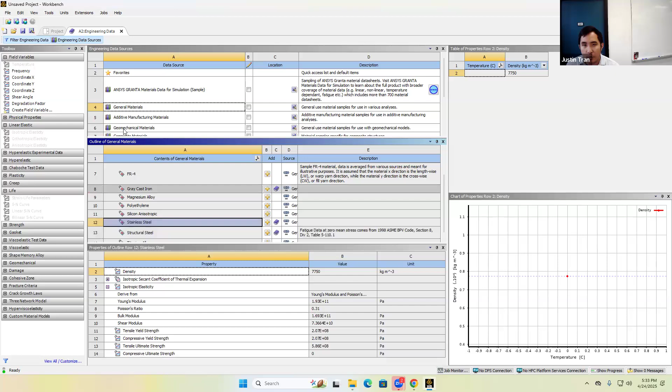I think stainless steel is actually quite similar to structural steel, but we'll go ahead and add that, looking at the stats here, very similar, but we'll add stainless steel here. So you should have three materials in your project: stainless steel, gray cast iron, and the default structural steel.

Okay, all right. So once you are done adding material properties, let's go ahead and close out of this. Double click on model, so let's go ahead and open up our ANSYS Mechanical here. And we'll be adding our mesh and boundary conditions, just like we've always done.

Now the reason we're starting with static structural is a couple of reasons. One being that, like we mentioned on Tuesday, when you're running a modal analysis and solving for the resonant frequencies, the state of stress within the material does affect the resonant frequencies. So we're starting with static structural so we can create a situation with some static stresses, and we'll see how that affects our results for the resonant frequencies.

But also later on, when we do frequency response, you'll be able to see kind of the result of resonance as well. So you'll be able to compare the deformation that you get from a static simulation versus when resonance is occurring. You'll see that resonance is going to act to amplify our static deformations.

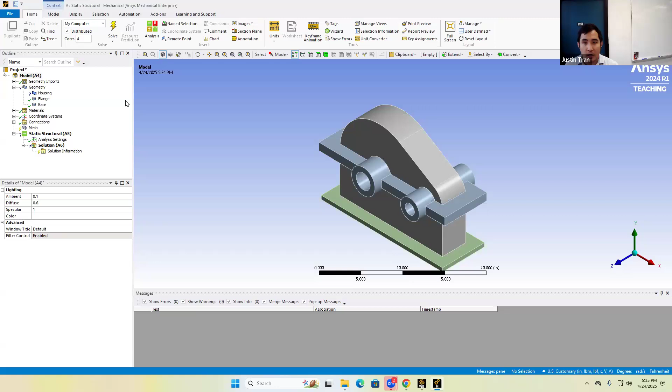Okay, so after you've loaded in your geometry, you should see the part right here. Our geometry today consists of three separate parts: we have the base plate, and that's where we're going to fix it. We have the flange, which is where shafts and rods are going to attach to, so this is where we're going to apply our forces. And then we have the main structural housing here.

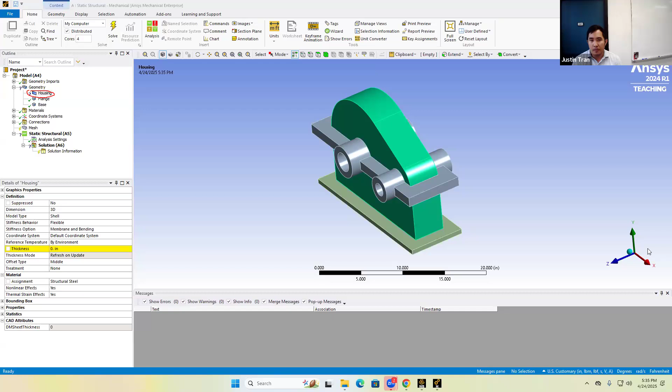Now, if you notice, the housing part here has a question mark next to it. That's because this housing component is actually defined as a shell. It's a little bit hard to see because the bottom of the part here is covered by the base, but this housing part actually is a shell element, so we actually do need to specify a thickness here.

So for the thickness for this part, we're going to specify a thickness of 3 millimeters. If your unit system is not in millimeters, go ahead and change that up here. So go ahead and specify a thickness of 3, and that's going to change the indicator next to housing to a green check.

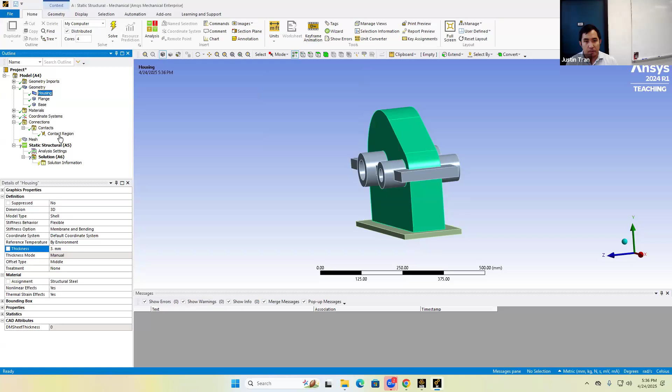All right, so another thing that we're gonna need to add before we start to mesh is we need to add our contact regions here. Right now there's only one contact region, and that's in between the housing and the flanges. But since our housing here is a shell, it's actually not properly attached to the base just yet.

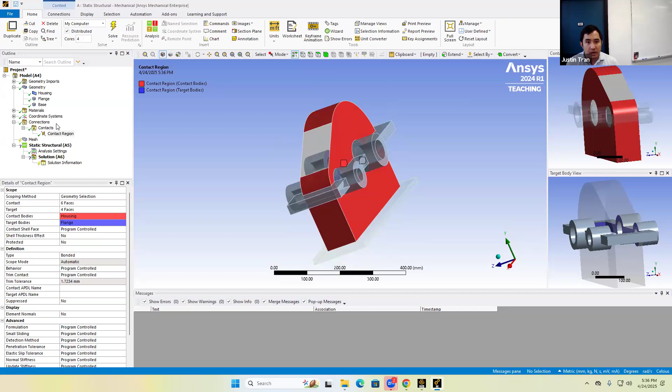Okay, so let's go ahead and do that. Let's go ahead and add a contact region. Just like we did in activity 4, right click under contacts here and insert a manual contact region. We're going to use this to connect the housing, or the gearbox, to our base.

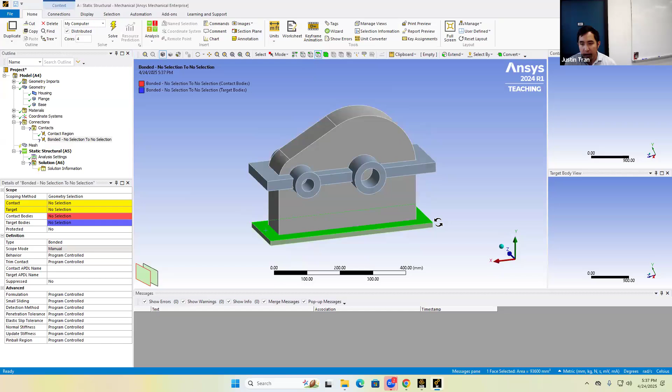Just like we did in ANSYS activity 4, we need to specify our two parts of the geometry here: our target and our contact. Remember, the difference between these is that the target has to be the bigger of the two surfaces. Since we're connecting the housing to the top of the base, given by this plane right here, this surface, we're going to specify that as our target. Then for the contact, we're going to specify the bottom edge of the housing here.

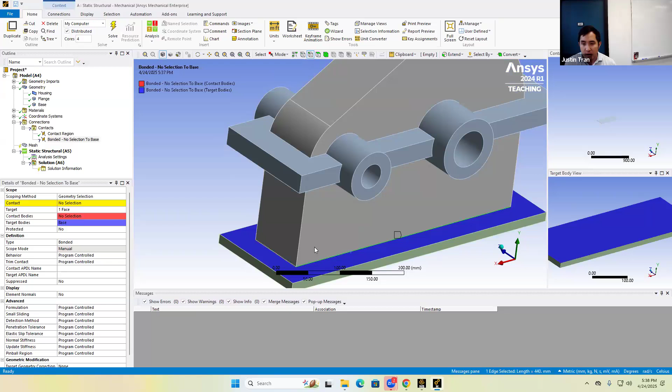Now, you have to be a little bit careful here, so make sure that, if you want to be absolutely sure, you can change the selector mode to edge mode up here. Then hold Control on your keyboard and click all 4 edges around the bottom side of the housing.

Okay, so once you have those 4 selected, go ahead and click apply here. So that way we've connected the bottom of the housing to the top of the base.

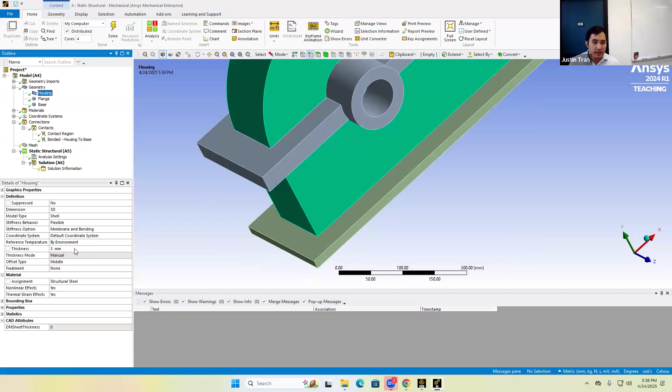Okay, and so that's all the adjustments that you should have to do. So just to summarize, make sure you specify a thickness of 3 millimeters for the housing, and then for the contacts, make sure that you specify a bonded support between the bottom of the housing and the top of the base.

Any questions on this so far? Okay, good. All right, so next thing we're going to do is we're going to specify a mesh.

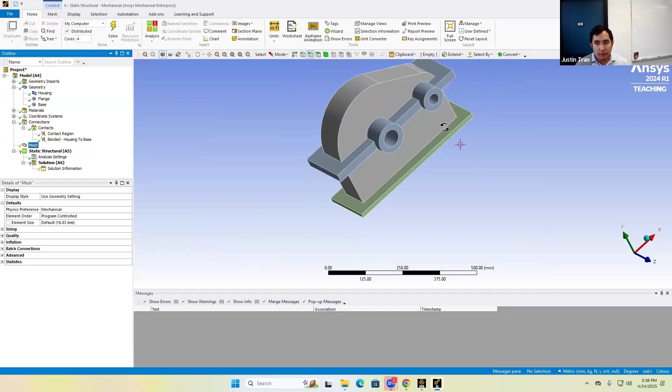Now for this activity, we're not going to be too picky on the mesh, just because modal analysis is a pretty cheap, relatively cheap analysis. So what you're going to see is that the resonant frequencies you get should converge pretty quickly. I'm just going to specify a size, not bothering to change the method. So let's specify a mesh size of, let's say, 8 millimeters. But you could probably even use the default mesh size and it should be fine as well.

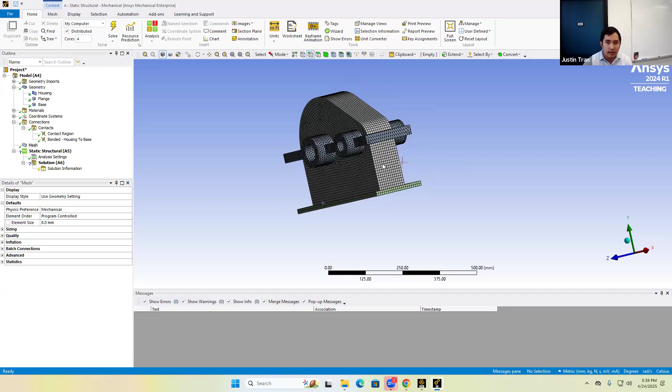So let's see what this looks like with 8 millimeters. Okay, so this is what my mesh looks like with 8 millimeters. You can see we have hexahedrons at the base, quadrilateral elements for the housing shell, and since the flange is a rounded geometry, ANSYS has chosen tetrahedral elements for that.

But again, don't fuss over the mesh too much in this activity. You're going to get pretty consistent results even with a fairly coarse mesh.

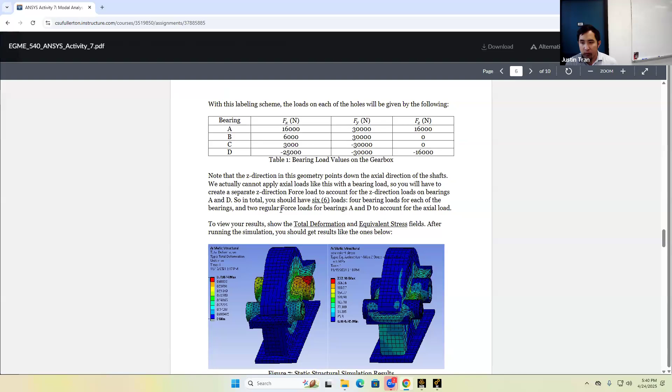Okay, so let's talk about the boundary conditions next. If we go to the activity here, if you scroll down enough, you'll see the loading conditions that we have. So we're going to be applying force loads on all 4 of these flange holes here. You can see from the top view, I've labeled them A, B, C, and D. And the forces are given by the following here.

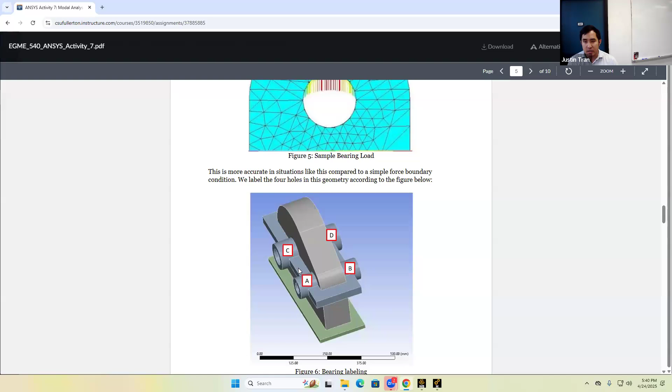So you can see we have forces in all 3 components in some cases, so X, Y, and Z. Okay, so you can go ahead and apply forces on these holes here. But we're going to apply forces in a little bit of a different way.

And the main reason I'm introducing this now is that some of you may be interested in doing this for your final projects. So we're going to be using a different type of load here known as a bearing.

Okay, so if you right click on static structural A5, you go to insert. You'll see that there is an option for loading here called bearing load. And if you read the description for bearing load, you can see that it says it inserts a bearing load boundary condition that simulates the radial forces applied on the interior of a cylinder.

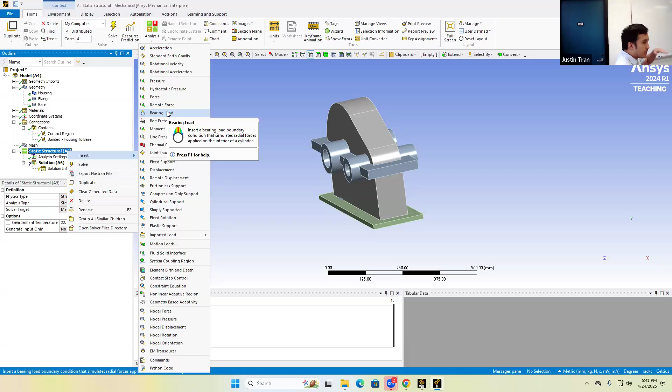So this is a special type of load that you can apply on circular type geometries to simulate the fact that you may have a rod that's inserted into the hole and kind of pushing up on one side of the hole.

Now why would you want to do this, right? So normally the way that we would do this is that we would just select a simple force load, and then apply it to, let's say, the interior surface of this hole. And then you apply your force in components. Right, and then you specify X, Y, and Z. So that's how we've always done it, right?

Now, I think I may have mentioned this before, but when you specify a force that's going to be distributed over a surface like this, what ANSYS actually does is that it evenly distributes that force across the entire surface.

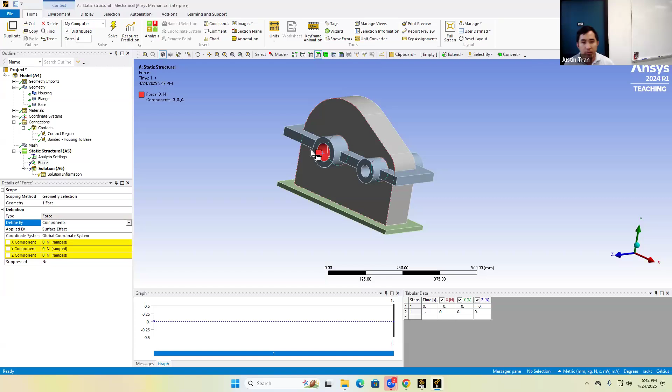So let's say that we apply a force in the X direction, a force of, I don't know, 5,000 newtons. So we have a force of 5,000 newtons being applied in the X direction. What ANSYS is actually doing is taking that 5,000 newtons and distributing it as if every single part of that surface is experiencing an equal amount of force.

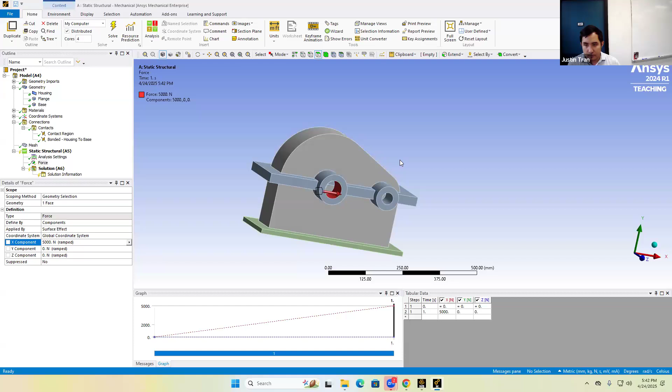So that means this part of the surface is experiencing the same force as this part over here. It's evenly distributing it across that surface. Now, for a lot of cases, this is what we want. We do want our force to be evenly distributed across our surface.

But for a cylindrical kind of hole like this, it's actually a case where we don't want that to occur. Imagine a rod that's being inserted into this hole, and there's a force being applied on this rod. Overall, there's going to be a net force applied on this hole, but it's not going to be evenly distributed because the force is due to the contact of that rod with the surface here.

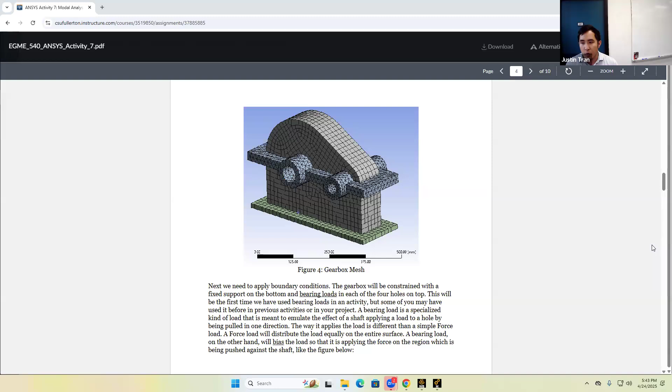If you think about it, if you put a rod in and you pull it one way, most of the force is going to occur on the portions where the rod contacts the inside surface of that hole. So what you have here is kind of an uneven distribution of the load, that actually looks something like this.

This has a similar situation where you have a hole here in a rod that's being inserted, and we have an overall net force being applied upwards. Now, because that force is being applied by a rod, most of that force is going to be concentrated on the upper half of that hole, because it's due to that rod contacting with that inner surface.

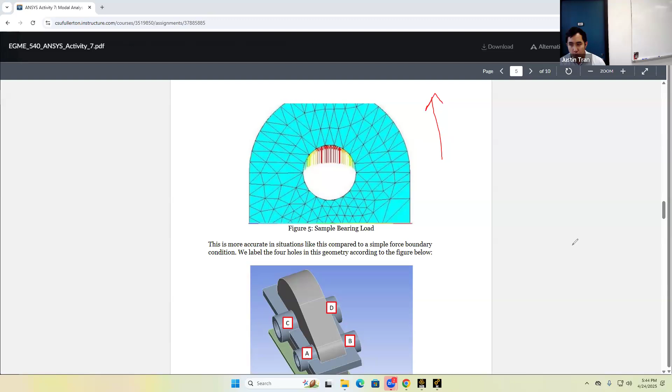And so we want to simulate that. We want to make our loading conditions a little bit more realistic. And the way that we can do that is not by applying a force load, but by applying a bearing load instead.

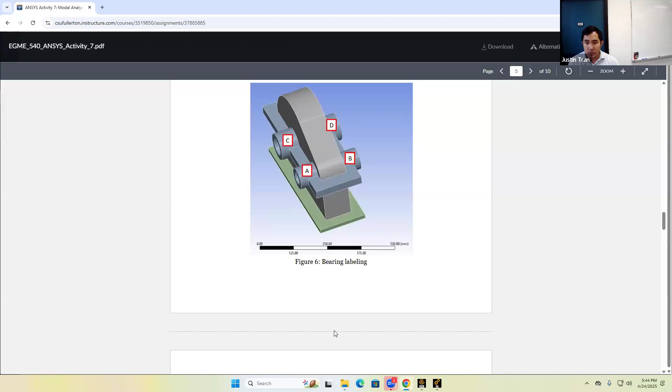So if we apply a bearing load on this surface, we can once again define it by its components. Now you can insert a bearing load, so let's see, that's hole C. Hole C has a force of 3,000 newtons in the X direction and minus 30,000 newtons in the Y direction. Let's go ahead and put that in: 3,000 for X, minus 30,000 for Y.

So you can see that puts a force mostly in the Y direction, but a little bit in X as well. But now how that force is distributed is a little bit more realistic to how that force would be applied in practice.

Go ahead and do that. I'll give you guys a few minutes to work on that. We have 4 different holes here and 4 different loads, so go ahead and apply those loads and make sure to use the bearing loads on those holes. Now you may run into an issue with holes A and D, but we'll talk about that in a second. So go ahead and apply your 4 bearing loads. I'm going to go ahead and apply it on my end too. If you have questions on this part, just go ahead and raise your hand. I'll make note.

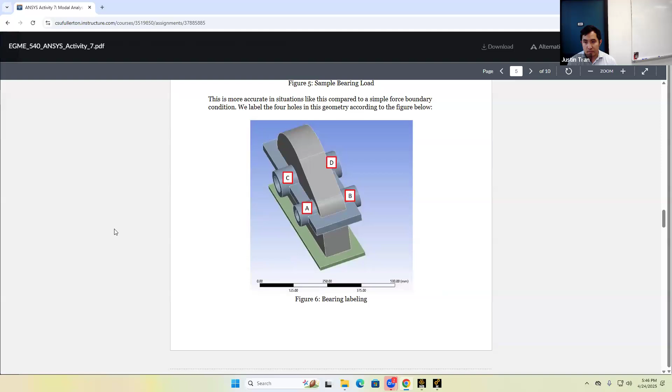Don't forget that you can relabel your loads, so you can rename them. In this case, it's probably useful just because there's so many loads to apply here.

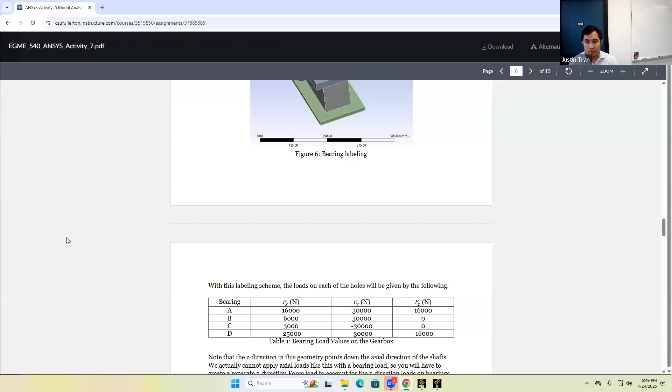How's everyone doing applying these loads? Anyone run into any issues yet?

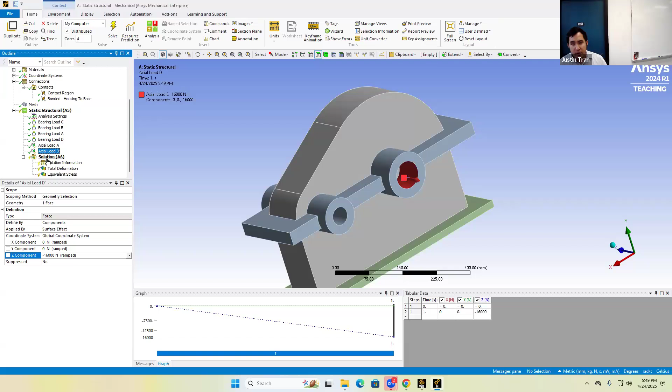If you try to apply all of the loads in the bearing loads, you might have run into an issue with load A and D. Holes A and D here are unique in the sense that they actually have a load in the Z direction. Now, if you look at the Z direction, it actually goes right down the barrel, or right down kind of the axial direction of the holes themselves. So a limitation of the bearing load is that you can only apply loads in directions that are perpendicular to the cylinder wall. In this case, because the cylinder walls are in the XY plane, you can only apply loads in the XY direction.

So if you want to apply a load that actually goes down the length of the hole, you need to apply that as a separate load. So for hole A and hole D, when you apply those Z direction loads, you need to apply them as a separate force condition. You can't actually apply them as a bearing load, so just be careful of that. Bearing loads are really nice, they're a nice feature within ANSYS, especially if your geometry has a lot of holes and you're applying loads inside those holes. But be aware of the limitations as well, and you can't apply any axial forces or axial loads on those parts of the geometry.

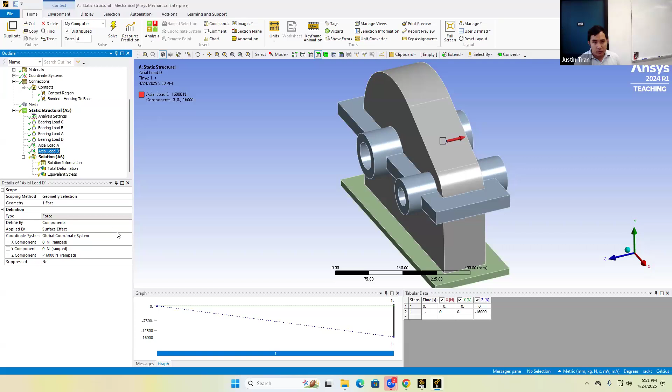Any questions on that? All right, so if you're done applying your loads, go ahead and add in the total deformation and the equivalent stress. Let's go ahead and hit solve.

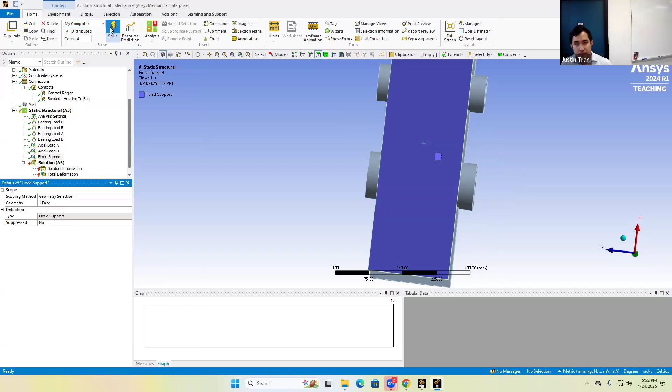Oops, I forgot. Don't forget your fixed constraint, you need that as well. Rookie mistake. All right, so add your fixed support. Our fixed support is going to be on the bottom of the gearbox. There we go. All right, so now we're ready, so now we are running our simulation.

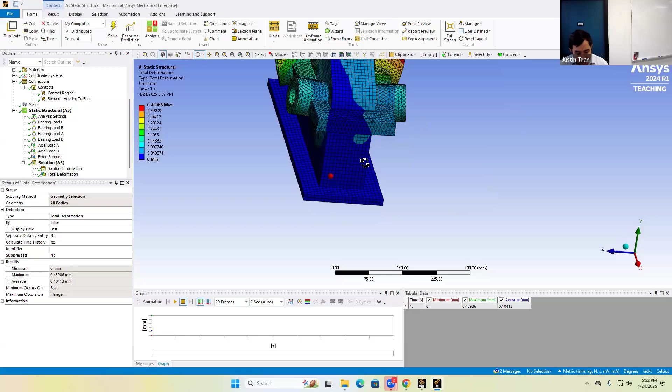Okay, so you should get a total deformation that looks something like this, and then your equivalent stress is probably going to look something like this.

The axial load is normal load on the face, right? Wait a second, the axial load is just a normal load, it's just normal force. On the face, right? Same face. Yeah, same face.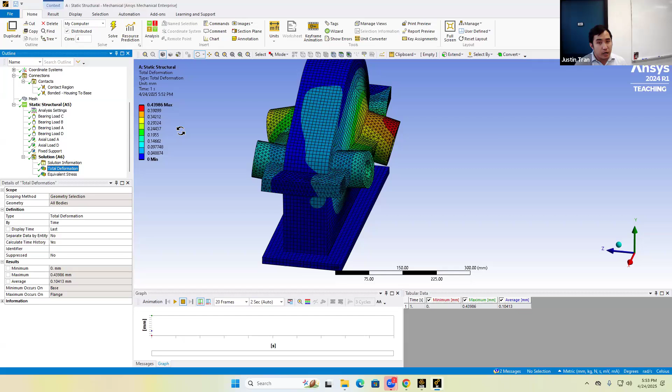All right, so this is what we have here, and I'm looking at the comparison with the activity. I'm using a little bit of a finer mesh here, and that actually makes our deformation computations a little bit more accurate. So don't be alarmed if your deformation is not exactly what it is in the activity, it does depend strongly on your mesh density. Probably what I should have done for this activity is a mesh convergence test, but we'll just roll with what we have.

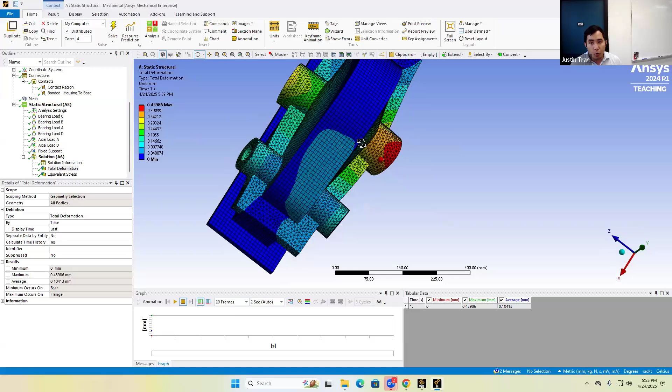But you should get a deformation field that looks something like this. Most of the load is going to be applied on hole D, and so that's why this is kind of pushing down. And a lot of your stress is going to be occurring right at that intersection in between. So that's just kind of a very basic static structural analysis for this part. Any questions on this so far?

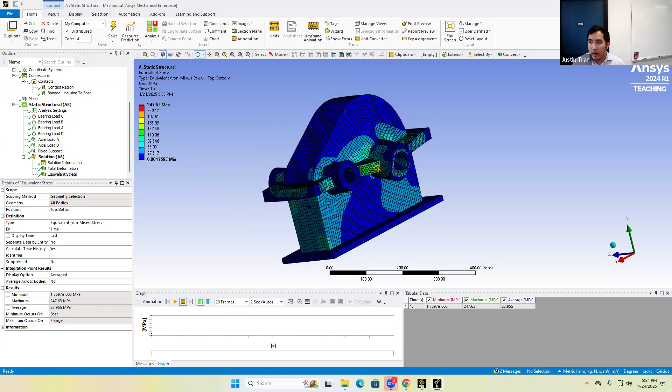Okay, all right, so that's our setup here, let's go ahead and move on to the new stuff. Let's go ahead and close out of ANSYS mechanical so that we can start to do our modal analysis. Let's go back to ANSYS workbench. And what we're going to add here is a modal analysis. So go ahead and click and drag modal, and you're going to drop modal on top of model in workbench right here, just like this. And what this is going to do is link together your static analysis, so it's going to inherit the mesh and the boundary conditions from your static analysis and use that as the basis for your modal analysis.

So I'm going to go ahead and click and drag that, and what I'm going to click from here is setup. So after you've connected your modal analysis to your static structural, go ahead and double click on setup to reopen ANSYS mechanical, except now it's going to have the modal analysis attached to it. All right, so was everyone able to get to this point here? Everyone have modal opened up on ANSYS?

Okay, and so from here it's pretty straightforward. Remember, all that we're interested in for the modal analysis is going to be our resonant frequencies. Now there's two ways that you can do this, one way is you can do it without any pre-stress. So if you go under modal B5 here, you'll see that there's a setting for pre-stress. Right now it's set to none, but if you want, you can set the pre-stress environment to static structural, which it seemed to do automatically for me here. So actually let's start with that, let's change our pre-stress settings to static structural, and then let's go ahead and hit solve.

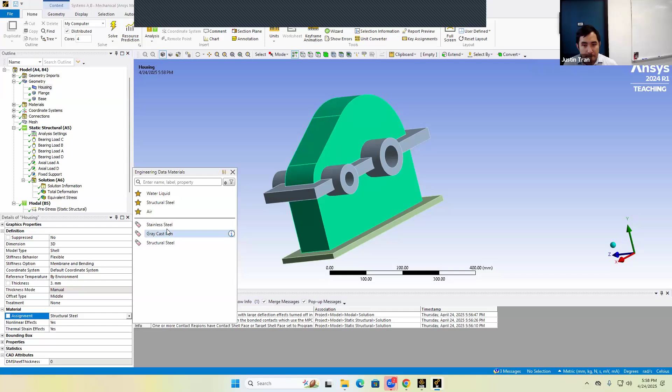Now for your other two parts here, they're going to be made of gray cast iron, so go ahead and choose that. For the flange here, go ahead and choose gray cast iron. And then for the base, go ahead and choose gray cast iron as well.

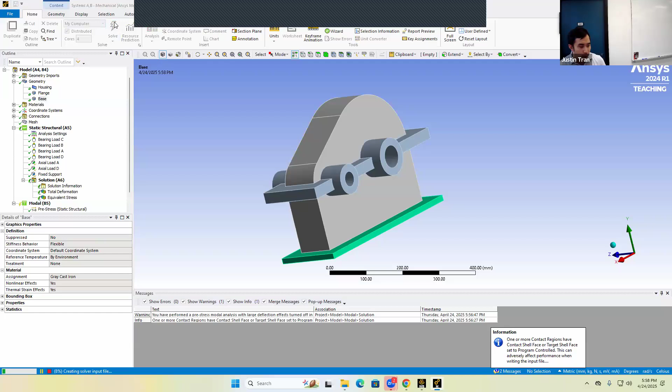Okay, now that we've updated our materials, let's go ahead and hit solve. That's going to resolve everything for us, so it's going to solve for the static structural analysis as well as the modal analysis. It might take a bit of time because it has to solve kind of 2 simulations at once.

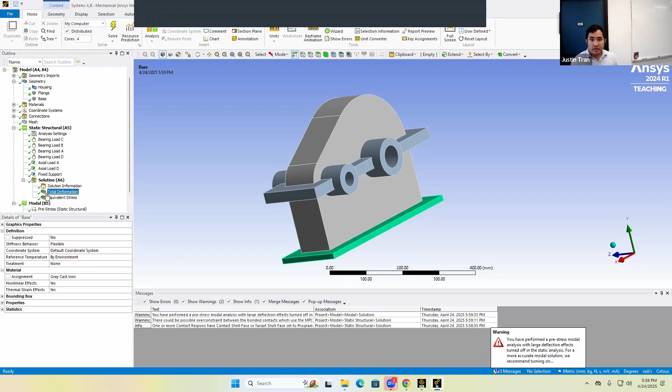Okay, so that's a bit better. That's a bit more consistent with what's in the activity. So in the activity paper, we have a total deformation of about 7.73 millimeters, and our maximum equivalent stress is about 240 megapascal.

Now let's see how that affects our resonant frequencies. You can see our resonant frequencies have changed a bit. Maybe the first resonant frequency didn't change all that much, but all the subsequent frequencies changed. Now our second resonant frequency is 503. Our third resonant frequency is 540. And 579, 661, and 767.

All right, and so that's about it. That's modal analysis for you guys. The main thing that we're looking for are these resonant frequencies. And remember, you're going to be using these resonant frequencies to design your system.

So for instance, this is a gearbox that's meant to go on a car, right? And so you want to make sure that these resonant frequencies don't match the RPM of the engine that's attached to your car, because that engine is going to be constantly applying this oscillatory load. And so you want to make sure that your gearbox's resonant frequency is nowhere near what the RPM of that engine is going to be.

Let me show you one other cool thing you can do here. In addition to the resonant frequencies, you might also be interested in seeing what the mode shapes look like as well. So to view the mode shapes, you're going to go ahead and highlight all 6 of these frequencies here, right click, and then click on the second option here for create mode shape results.

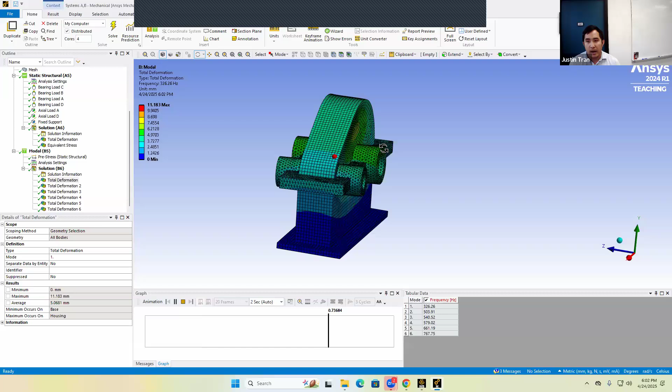So now you can see how the mode shape is going to look if resonance were to occur in this geometry. Most of the resonance is going to occur in this top portion right here. In fact, you can play the animation to see what it would look like. You can see that the entire structure is going to be rotating left and right, and then this top portion here is going to be bulging out. So that's where most of the resonance is going to occur.

Okay, now be careful with this. Remember I mentioned on Tuesday that when you're showing the mode shapes in ANSYS, ANSYS presents it to you in a way that's a little bit misleading. If you look at this mode shape result, you can see that it's listed as total deformation, and it even has units. From this, it says the deformation is going to be 11.1 millimeters.

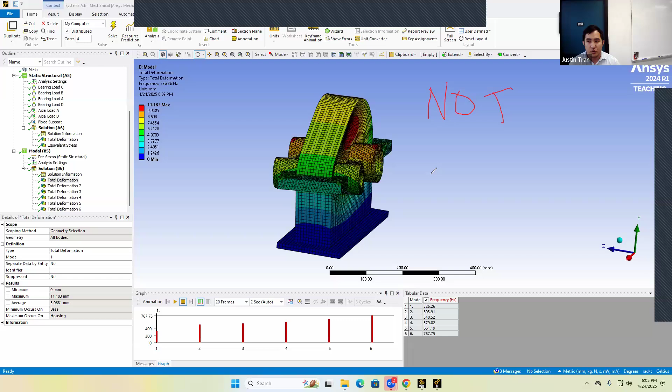Remember that when you're showing the mode shape results, these are not true deformations. This is not the actual deformation in this case. These numbers are only there to show you the relative amount of deformation for that part of the geometry. We haven't actually applied any loads here, even though we did apply the pre-stress. So when you're showing the mode shapes, these are not true deformations. I put it in big writing to emphasize it: not true deformation.

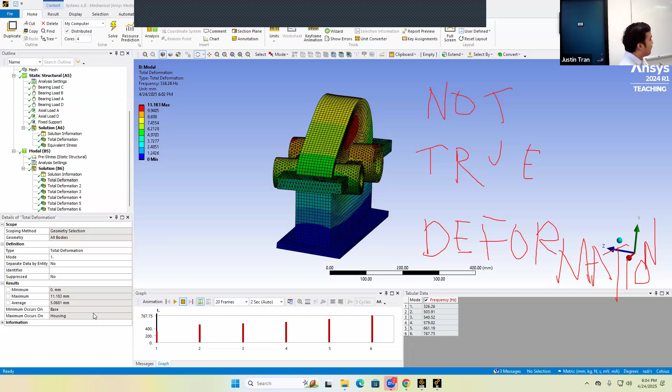So don't show me these mode shape results and say that this is the amount that is going to deform. That's not true. These mode shape deformation plots, quote unquote, are only there to show you the shape of how the resonance will occur.

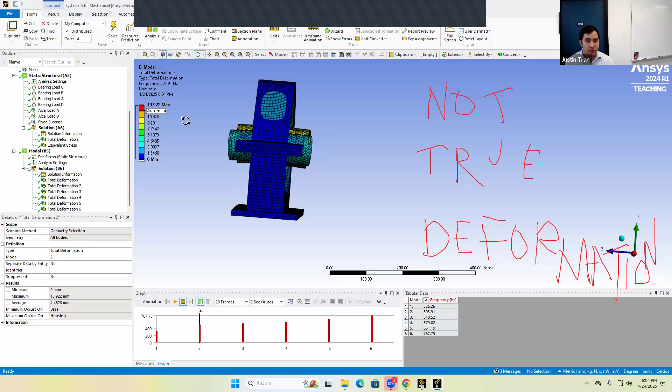Because if you look at the second mode, we can see that the mode is completely different. If we play the animation here, you can see that this resonant mode has to do with expansion of the entire material, not a left to right motion. But again, these magnitudes, these numbers, are not true deformations. They're only there to show you the relative shape.

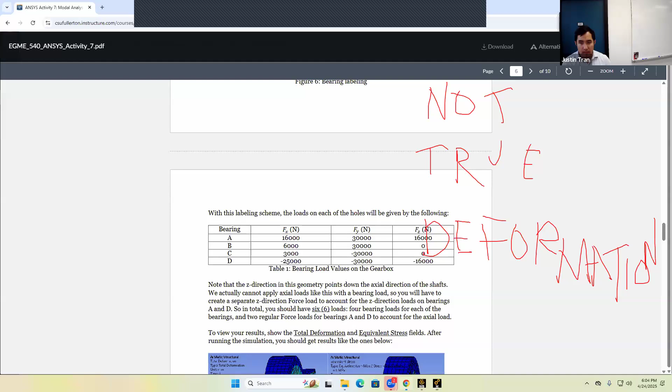Any questions on this? Okay, all right, so let me show you the rest of the activity here. We've basically gone through problem 2 on the activity.

For problems 3, 4, and 5, I'm basically going to ask you to modify certain parts of this geometry to see what effect that has on the resonant frequencies. So the first one here is pretty simple.

For problem 3, I want you to change the material properties and see how that affects the resonant frequencies. Choose one material that's stiffer than stainless steel, and another material that is less stiff or more flexible than stainless steel. You can tell the stiffness based on the value of the Young's modulus. Tell me the results, show me the resonant frequencies, and show me the motions.

For problem 4, I want you to change the geometry. Since this part was actually made and designed in Design Modeler, you can go in and adjust the geometry and see how that changes things. Or the easiest way to do this is to simply change the thickness. Remember that earlier we changed the thickness of the shell element to 3 millimeters, so you can change this to 4 and 2 millimeters and see how that affects your results.

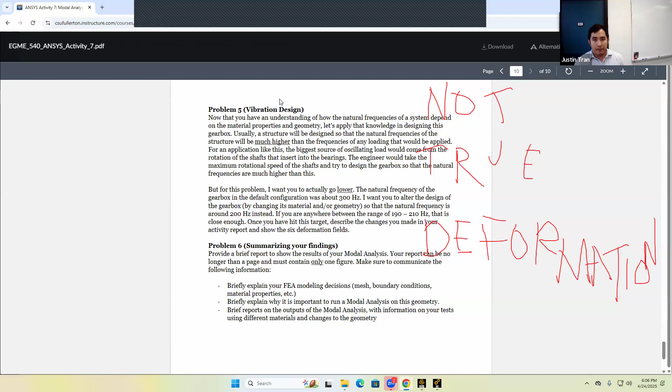After you've made changes to the material properties and the geometry, in problem 5 I want you to design this gearbox for vibration. There's a target frequency that I want you to hit. I want you to adjust the design of this gearbox so that you hit a natural frequency of around 200 hertz.

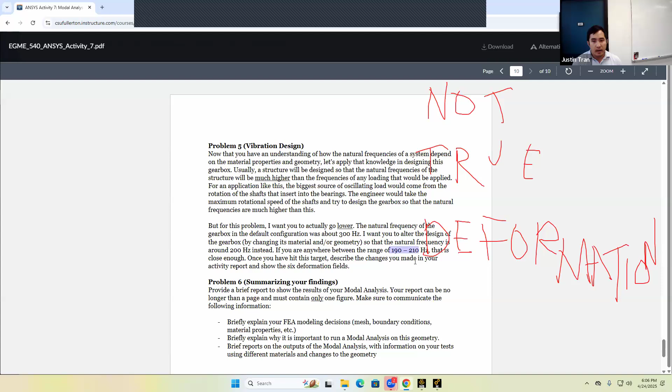Now, this might be difficult to get exactly on the nose, and so just like we've done in the past, as long as you're close, within maybe 5%, so 190 to 210 hertz, that's going to be good enough for me. But I want you to make changes, either to the material properties or the geometry or both, until your natural frequency is around 200 hertz.

And then problem 6 is just to summarize your findings. All right, any questions on that?

Okay, so that's activity 7. I do want to show you guys frequency response, but I do want to take some time right now to walk around and see how you guys are doing. If you have questions on the activity or on your project, I'll go ahead and answer those.

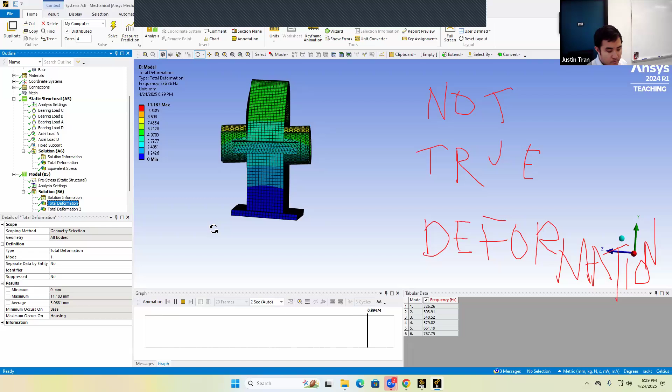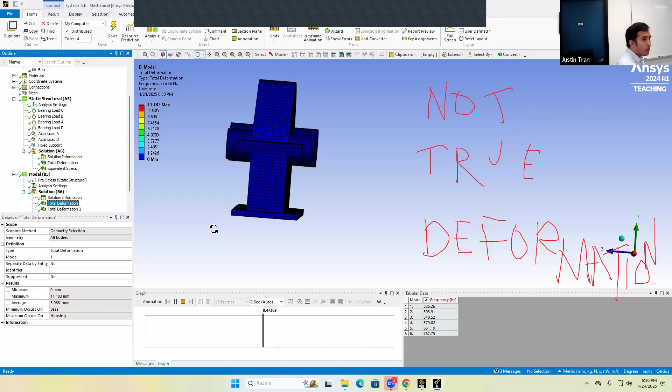All right, so one last thing I did want to show you guys before you head out today is how to do harmonic response. So all we've done so far in modal analysis is find out the resonant frequencies. But a lot of times, when you're doing frequency response or resonance analysis, you want to actually see how much the deformations and stresses are going to amplify as a result of applying or achieving resonance. Okay, let me just show you that really quick.

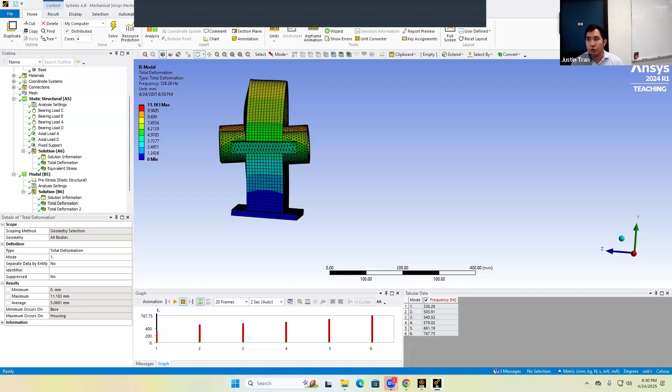If you're curious, there is a handout for this online. This is not part of the activity, so this is not something you have to turn in. But if you go under the lecture notes on the Canvas site, you'll see there is a handout A6. A6 is about harmonic response analysis—it's short, only about 6 pages. But it shows you how to take a modal analysis and go to a harmonic response from there. I'm just going to show you that quickly so you can watch and see.

The starting point for harmonic response is always a modal analysis. So I'm going to click and drag harmonic response, and drag that on top of the modal analysis here. What that's going to do is link your modal analysis to the harmonic response. From there, you should be able to double click on setup to reopen ANSYS mechanical. I know we've closed mechanical and opened it up again several times today, but each time we're adding a new feature, so each time you add a new feature, you have to reopen ANSYS mechanical.

Okay, so I've actually never done this before. I've never linked it from static structural to modal to harmonic response. Hopefully it inherits all the loading as well. We'll see. Otherwise, we're going to have to apply that loading ourselves.

After you've loaded up your harmonic response, you can see here that we've created another analysis area called harmonic response C5. Just like we did before, right underneath harmonic response, you're going to click under modal environment, and you're going to click on modal. That's going to load in all the settings from your modal analysis.

So that should load in all the settings, the boundary conditions, the constraints, all that from your modal analysis. The next thing you're going to click here is analysis settings, and here we're going to be able to set various settings for our harmonic response.

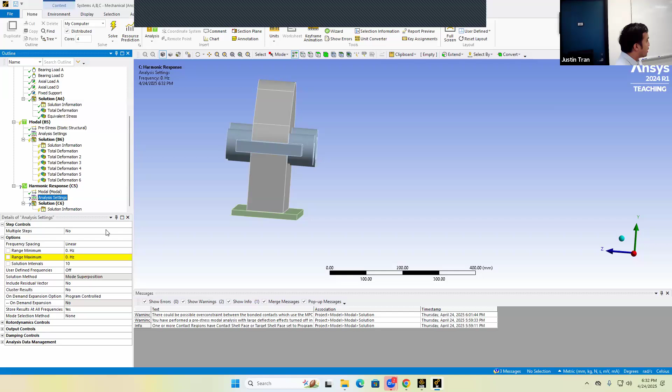So what ANSYS is going to do with the harmonic response is take your loadings and oscillate them with certain frequencies. Now you have to specify how much frequency or what range of frequencies you want to test in your harmonic response.

So the default minimum is going to be 0, but you have to specify a maximum as well. Let's specify a maximum of 600. So that'll test all the frequencies between 0 and 600.

A couple other settings that we're going to change just to make things a little bit smoother for our results. The next thing we're going to change here is cluster results. We're going to change this from no to yes.

The other thing that we're going to change here is we're going to add a little bit of damping, just to make sure that our deformations don't get out of control. Because normally when you achieve resonance and there's no damping in the system, the deformation just kind of blows up to infinity. So we don't want that. So we're going to add a damping ratio here of 0.1. That's under damping controls, and all these are under analysis settings for the harmonic response.

All right, so next thing we're going to add here is our solution. Right click on solution C6, and then from here, you're going to go under frequency response.

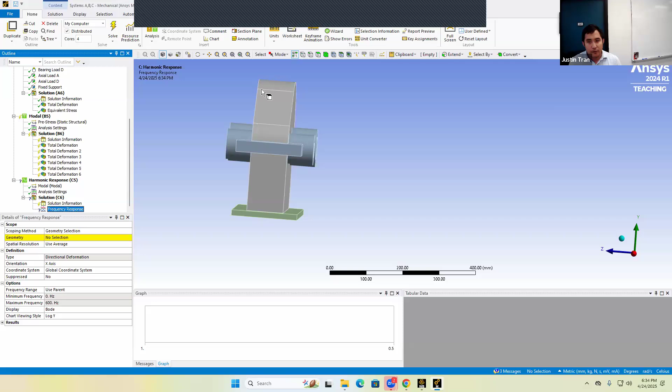And let's look at the deformation, that's kind of the easiest one to look at. For the geometry here, we need to specify what part of our geometry that we want to view the frequency response for. So let's just view kind of the whole geometry. Actually, let's look at the flange.

For the spatial resolution here, let's change that to maximum. So we're going to look at the maximum deformation for this entire structure here. And then for the deformation here, we have to choose which direction that we want to view the deformation.

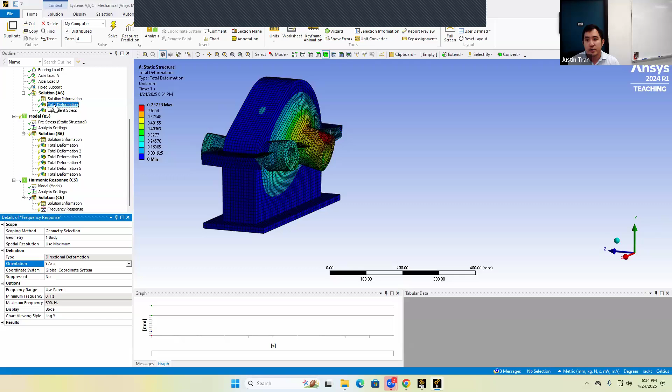So let's choose the y-axis, just because if you remember from our static results, we had most of our deformation in this case in the y direction. So let's check our frequency response in that y direction. Once all that's done, let's go ahead and click solve. That should solve everything here for us.

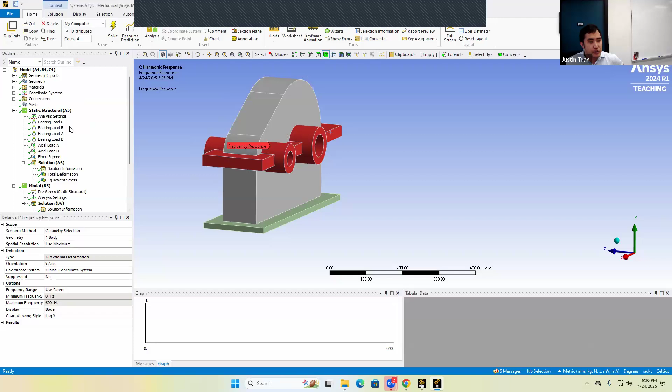Okay, I apologize. So it looks like in order to perform the frequency response, you actually need to apply the load separately. We're not able to inherit the load from our static structural here. So let's go ahead and right click on harmonic analysis C5, and then we're gonna insert a force.

Now, if you wanted this to be really realistic, you could recreate all the loads that we have up here. But just so I can illustrate this to you, let me go ahead and just add a single force here, and we're gonna add it in the Y direction. I'm gonna add in a force of 30,000 newtons in the positive Y direction.

Okay, all right, so let's go ahead and solve this now. Oh, we may have to add a fixed support. We're gonna add a fixed support. Yeah, since it's not inheriting all the boundary conditions, we have to add our fixed support as well.

Oh, we actually got something. Let's see. Okay. Actually, let me go ahead and add that fixed support here, just so that we can see. Oh, actually, I think it already inherited the fixed support.

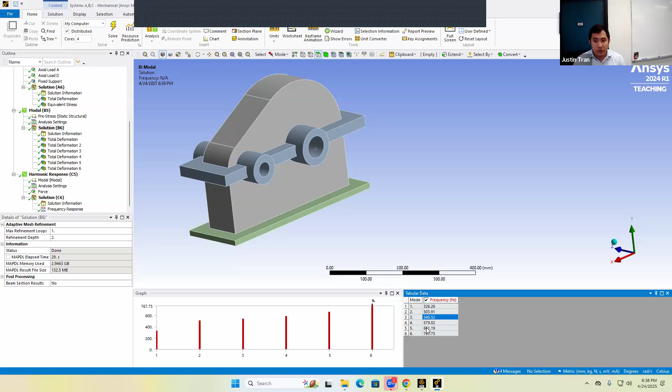Let's look at our modal analysis. You can see here that we have a resonance at about 326 hertz, so that makes sense. And we have another resonance here at about 540. Those correspond to the peaks that we have here.

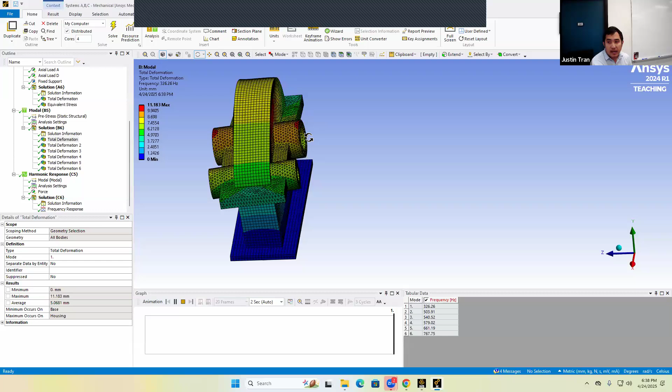But remember, this frequency response here was for deformation in the Y direction. And each of these resonant modes has deformations in a given direction. If we look at the resonance for the first mode, you can see that most of the deformation is actually in the Z direction. So if you wanted to see more pronounced resonance, you would change your frequency response here to the Z direction instead of the Y direction, and that's going to change the shape of your frequency response curve.

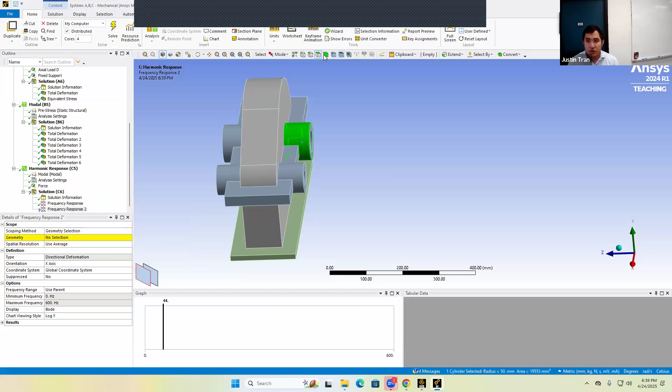Let me do that really quick, just so we can see. Response, deformation, look at the flange, maximum. And let's look at the deformation in the Z direction. Okay, so let's take a look.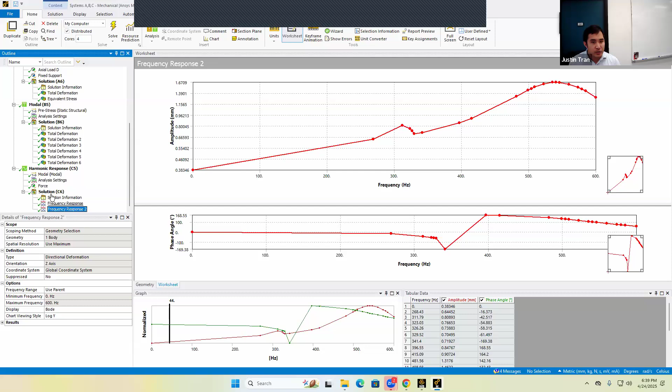And of course, if you change the direction of the force as well, that's also going to change your resonance. So if we change the forcing to be in the Z direction instead, let's see what that looks like. Let's go ahead and solve this.

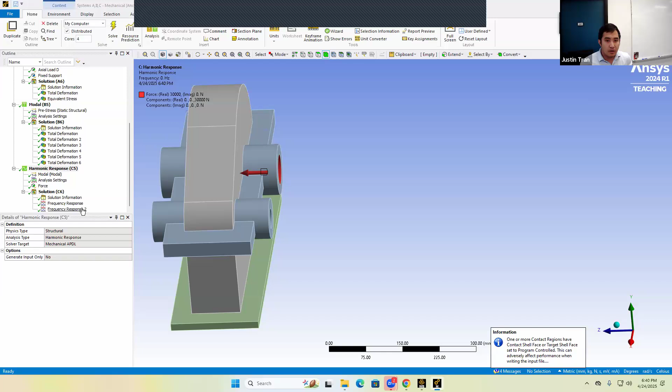All right, so you can see that once we change the force in the Z direction, we get much more pronounced resonance here at our first resonant frequency, which is 324.

Okay, all right, so one other thing I want to show you right before you guys go is the comparison of the static deformation versus the resonant deformation. So your frequency response graph at 0 hertz, this is the static response.

So you can see here from the static result, we get a deformation of about 0.77 millimeters. But when resonance occurs, you can see that our deformation here gets amplified to about 2.69 millimeters. So that's an increase of about 3.5 maybe. So you can see resonance amplifies your deformations.

So, if you look at any engineering system and you amplify your deformations by about 3.5, that's usually a bad thing. That's usually not something that you want to occur in your engineering system. This is just meant to illustrate to you how destructive resonance can be in these types of systems.

All right, any questions on this?